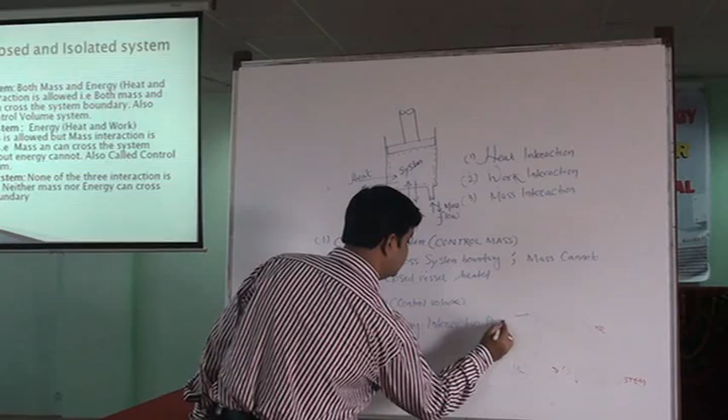Next is open system. As I told you, this is also called control volume system. Here, both mass and energy interaction is possible. For example, all steady flow devices, that is compressor, boiler, turbine, etc.

And the third case is that of an isolated system. As explained already, neither mass nor energy can cross the system boundary.

What is an example? The example of any closed insulated vessel, like a thermoflask. Thermoflask is not perfectly insulated because there are some amount of heat losses always present, but considering as an ideal case in which the thermoflask is perfectly insulated and there is no heat loss, we can assume that to be an isolated system. Our universe is considered as an isolated system.